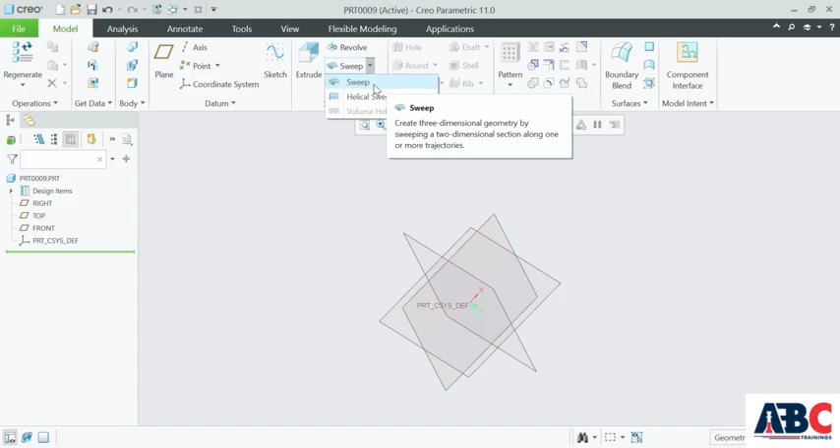So we are in the model space. Go to the sweep. There are two sweeps. First is a sweep which creates a three-dimensional geometry by sweeping a two-dimensional sketch along one or more trajectories. Then there is a helical sweep which sweeps a two-dimensional sketch along a helical trajectory.

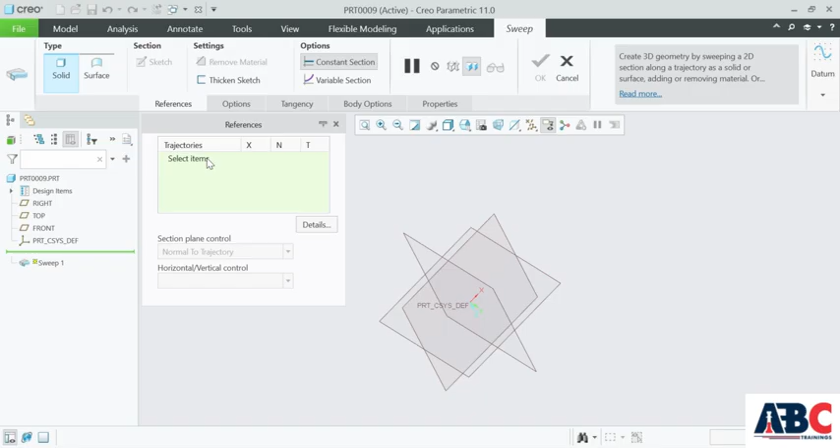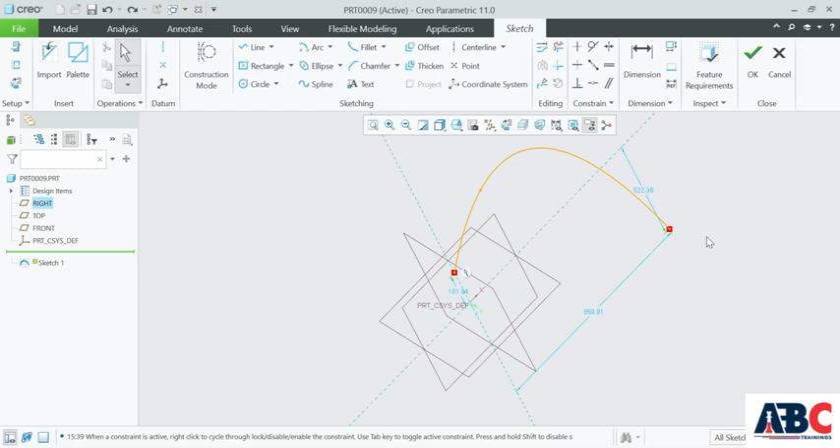We'll see the first sweep. For sweep we will need a profile. When we click on sweep, you can select the trajectory here. So first create a trajectory, sketch this plane. I will create a sketch. Click OK. Then we will go to the sweep.

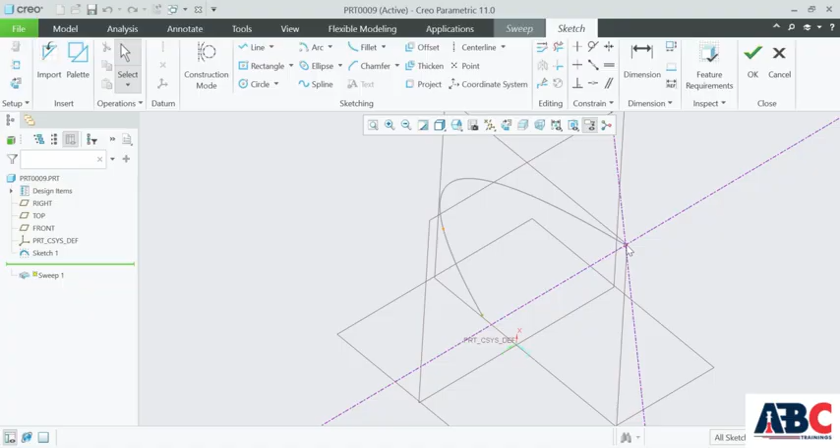In the sweep we select this trajectory. So this trajectory has been selected. We'll go to the section. We need to create a section here. Click on section, normal to this point. We'll create a section here. I will create a circle. Click OK.

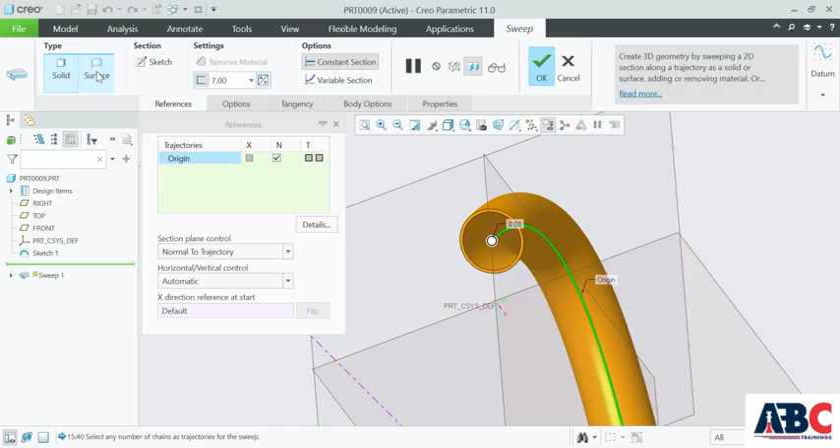We have created a sweep. You can also provide thickness to the solid model. From here you can thicken it and provide thickness. You can also create a surface from this. So this is the surface. This is solid. We can provide thickness here.

We can also create a variable section. This is a constant section throughout the trajectory curve. We can also create a variable section. Click OK. This is how we can create a geometry.

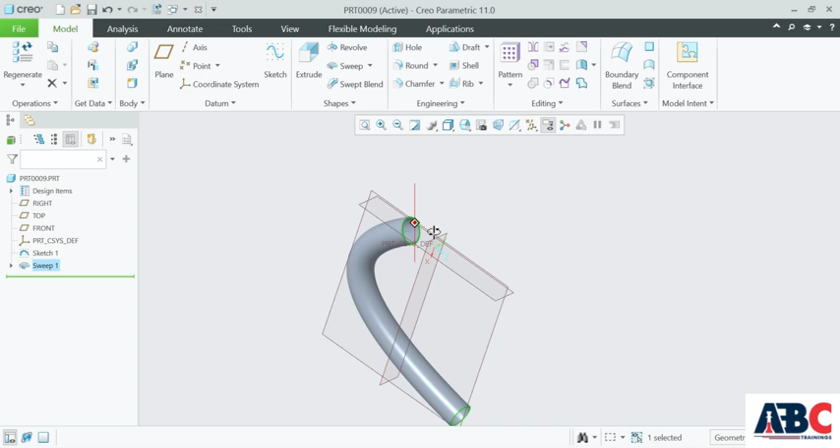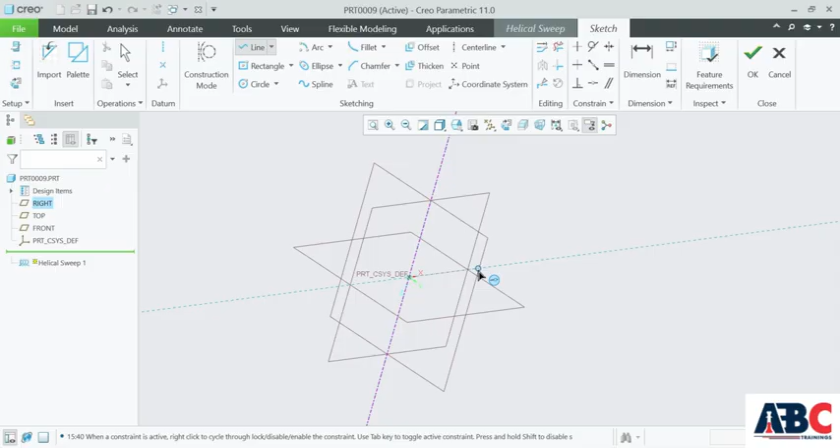Now we will see how to create a helical sweep. Go to the helical sweep command. It requires a helix profile. We will define a helix profile here. Sketch. I will create a center line. This will be the helix center line, and I will create a line here. Click OK.

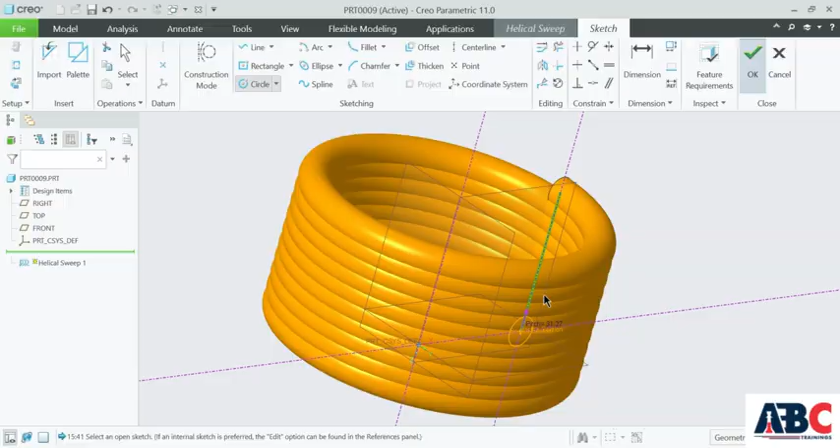We will require a section. You can see this here, section. Create a sketch, and I will create a section here. Click OK. This is how we can create a helical sweep. So this is a helical sweep.

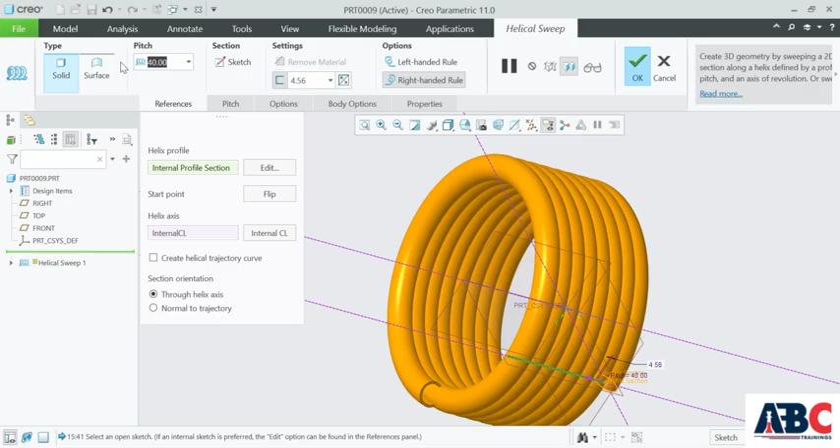Also thicken the sketch, so thickness will be provided here. And also change the pitch here. I will change this to 40. Okay, we'll change it to 70. See this, this is how you can create a helical sweep.

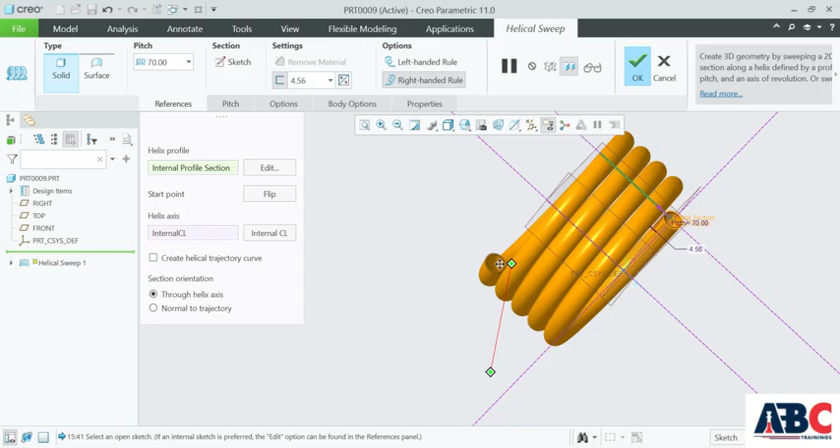This is how you can create a helical sweep in Creo Parametric. Thickness has been provided, you can see this here. You can also create a surface. So this is a surface of a helical sweep, and you can also create a solid and provide thickness.

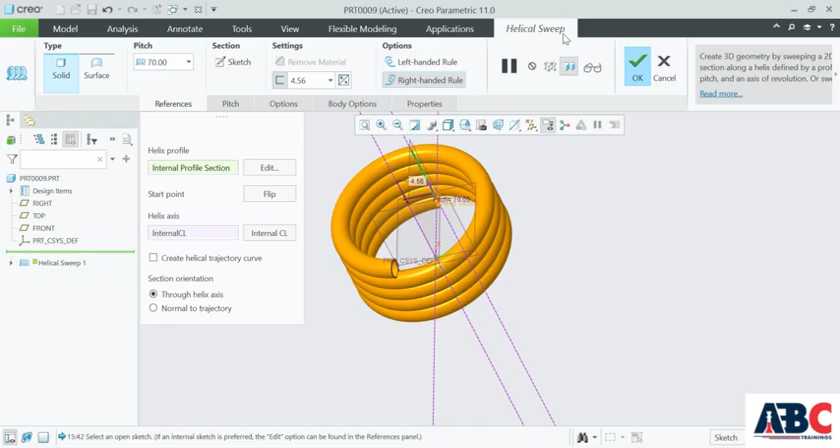Here is the left-handed rule, so it will be a left-handed rotation. This is right-handed rotation. This is how you can create a helical sweep. Click OK, and the helical sweep will be created.

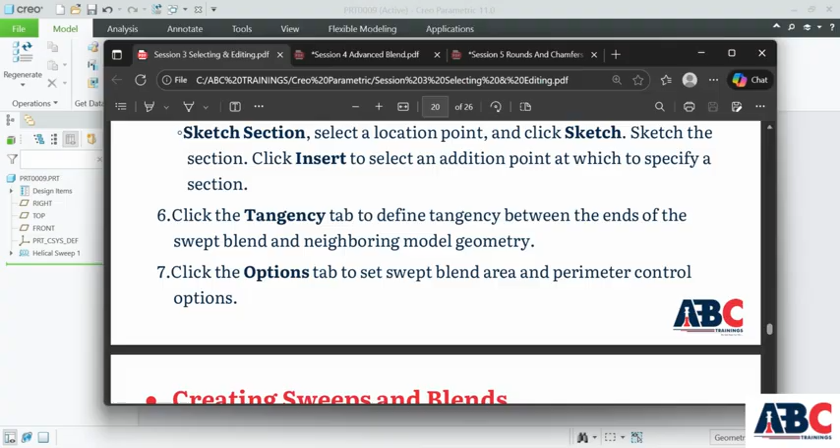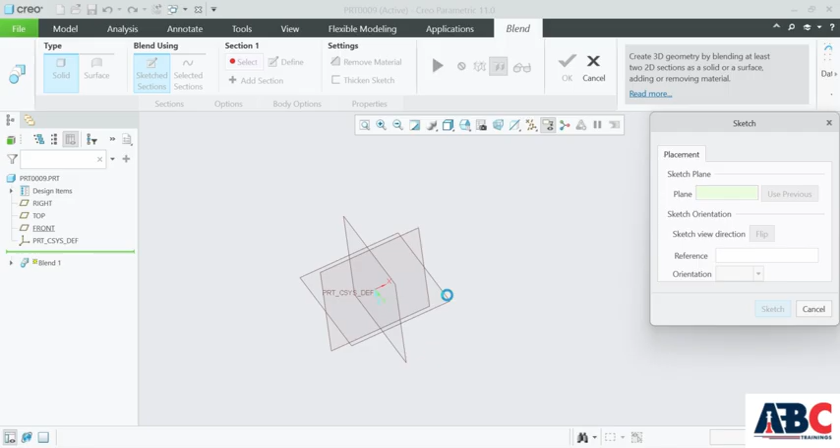Next we will see how to create blends here. So we create blends. We'll go to the blend section. Click on blend, then first section. We can also define the section here. Create a first section, I will create it as a rectangle.

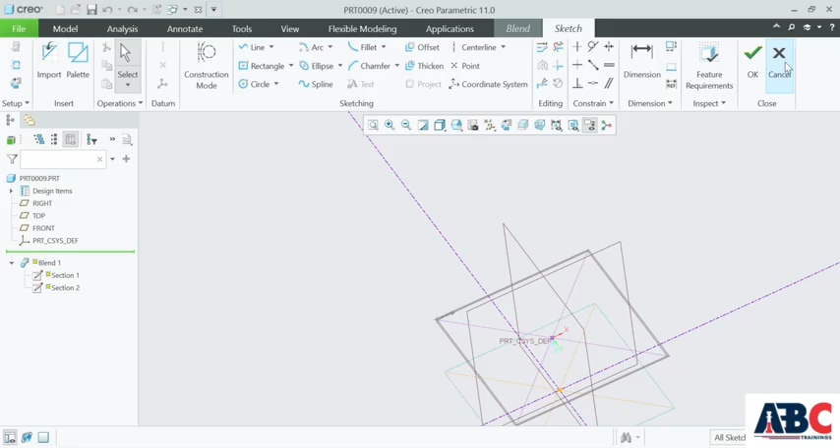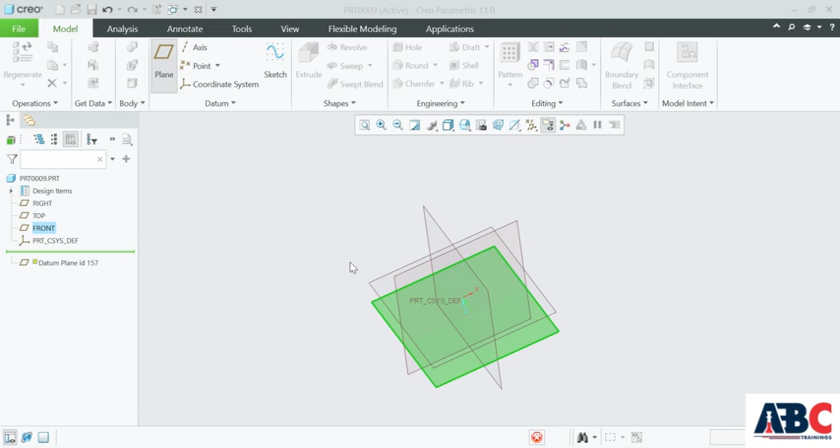Click OK. Then second section, we'll sketch. So we'll simply create a section by using datum features. Go to the datum plane. We will create a plane offset to this, 50. I have created an offset plane. I will create a sketch here.

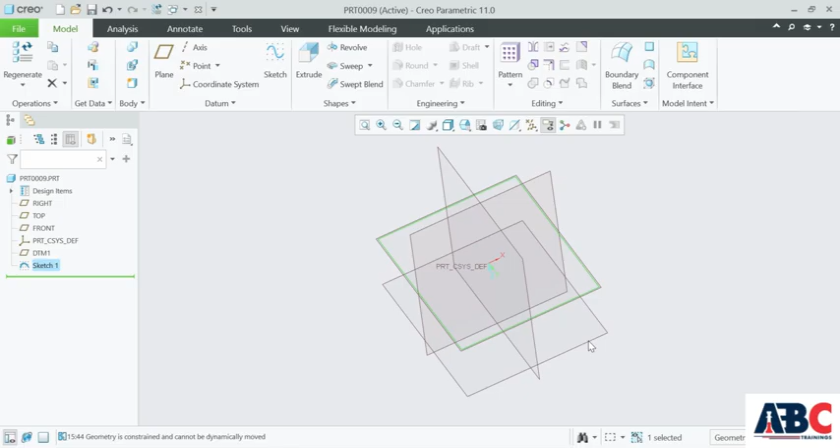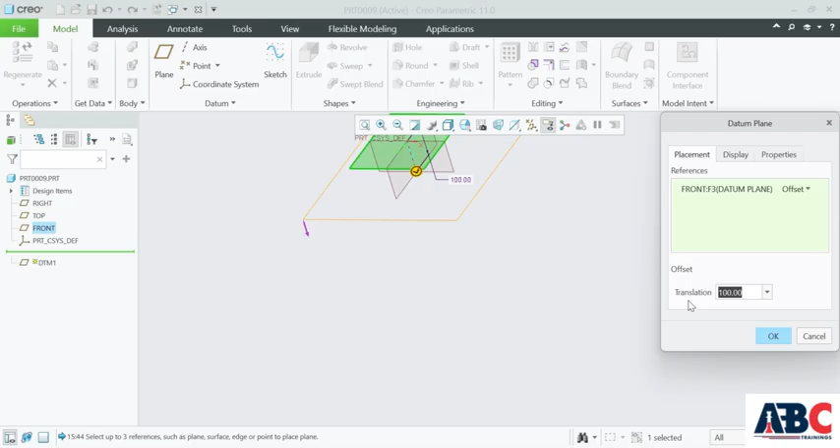I'll create a circle here, another section. Now I will edit this feature. I will change it to 200.

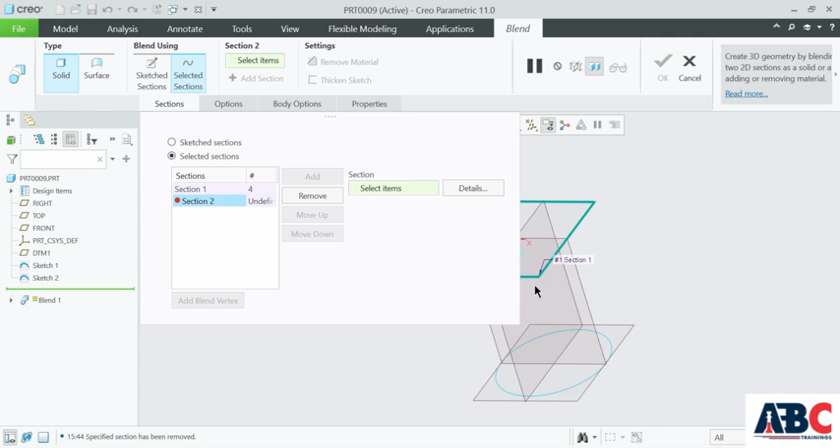Go to the blend. I'll create this first sketch, then I will select this second sketch. Selected sections come. I will select this section as first. Add, and I will select this section. You can see this.

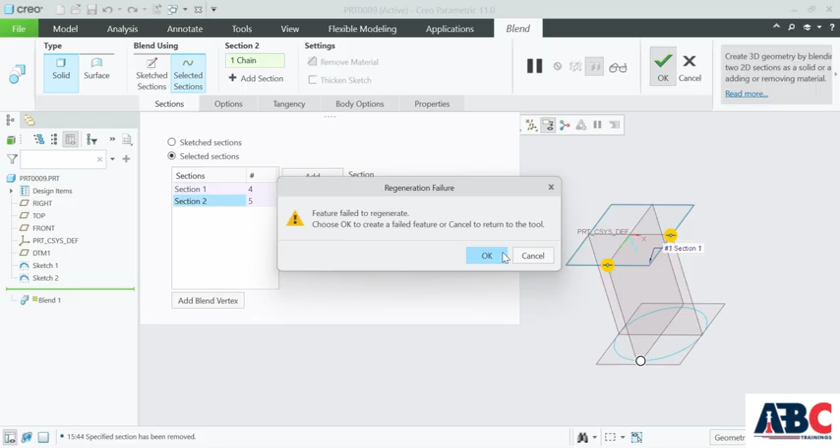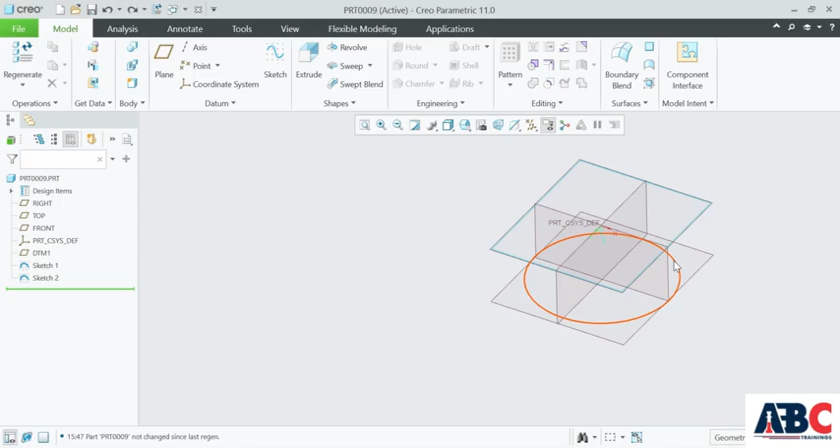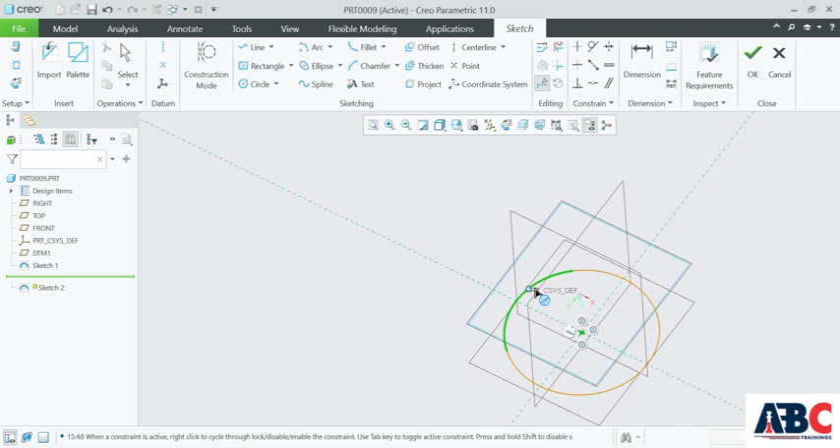If something went wrong, we'll edit this sketch. We need to edit this case, just a little modification. We need to blend this rectangle to this circle. This has 4 vertices, so we need to divide this. I will divide this into 4. So this circle has been divided into 4 arcs. I will click OK, then go to the blend.

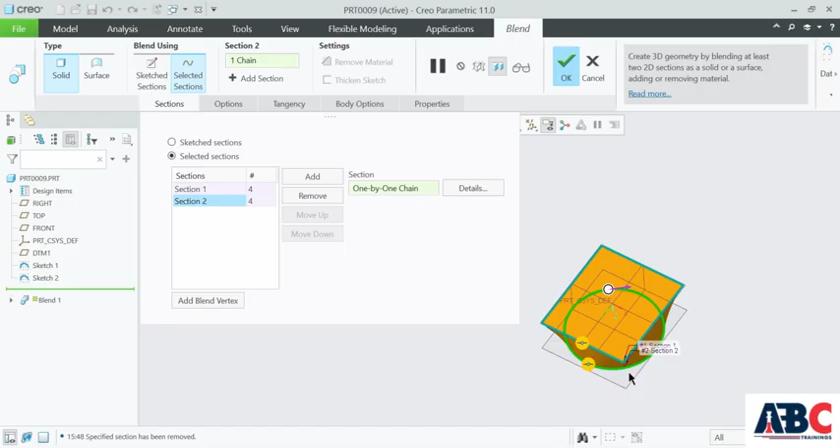We will select the selected section. I have just clicked selected section. Then I select this first section, then I go to add, and select this second section. So what happens, you see this, the points have been created on the circle. This vertex has been joined to this point, which has been divided. This is how you create a blend. Just simply click OK, and this is how you can create blends.

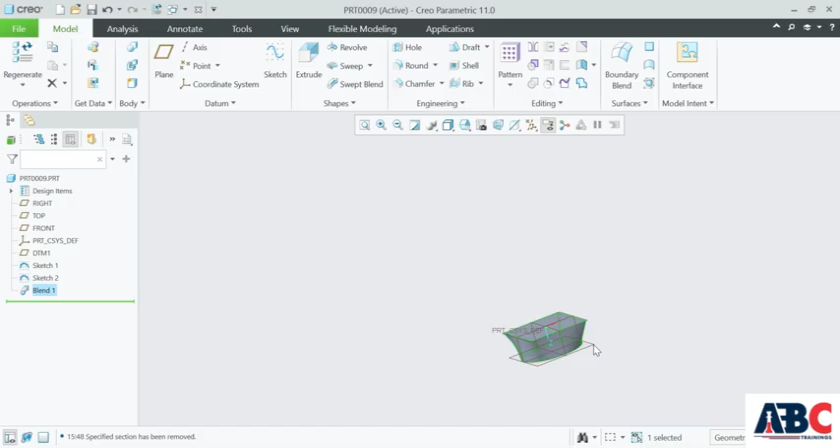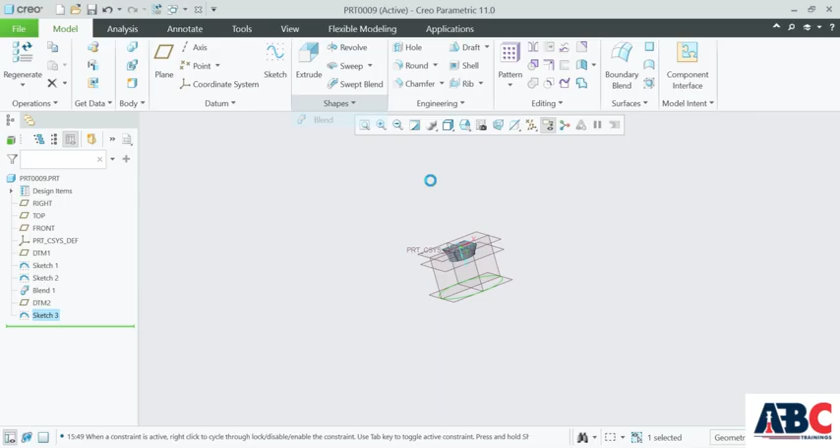We will create another one here. I will create a plane here, datum plane, offset to 300. I will create a sketch here, another sketch. We'll create a sketch, let's create a bigger circle. What I will do, I will blend this. Selected sections: select the first section, add, and select the second.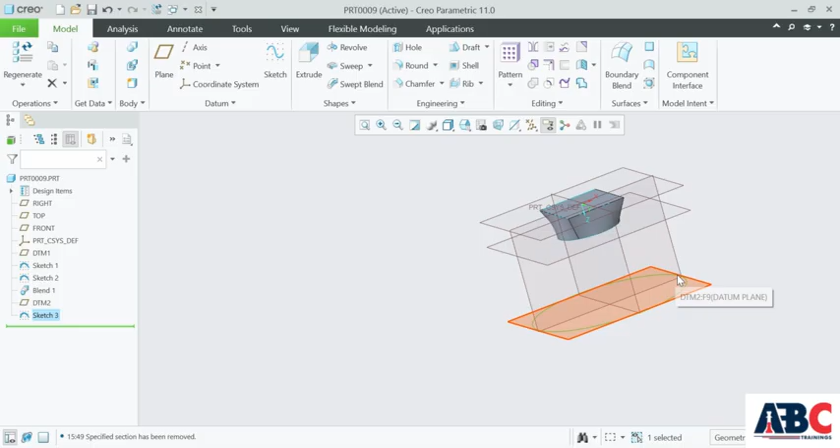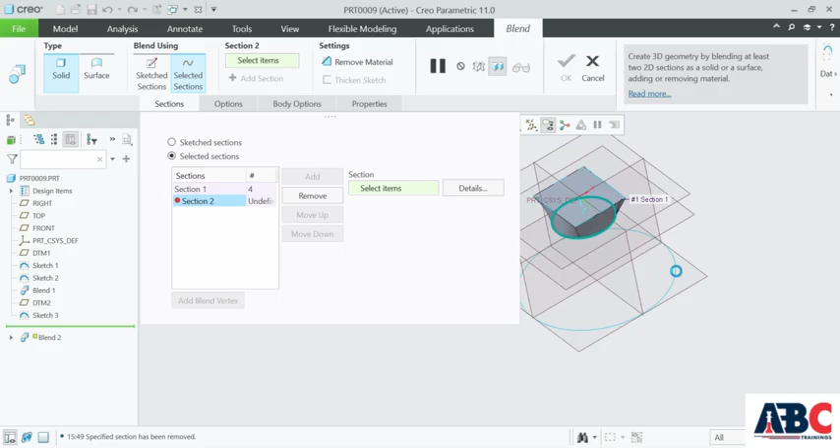We need to divide this section also. So I will just edit this sketch and edit it. I will divide this second, third, and then fourth. Go to the blend. Select the first section, selected sections, select the first section, then I will add and select the second section. So this is how you can create a blend.

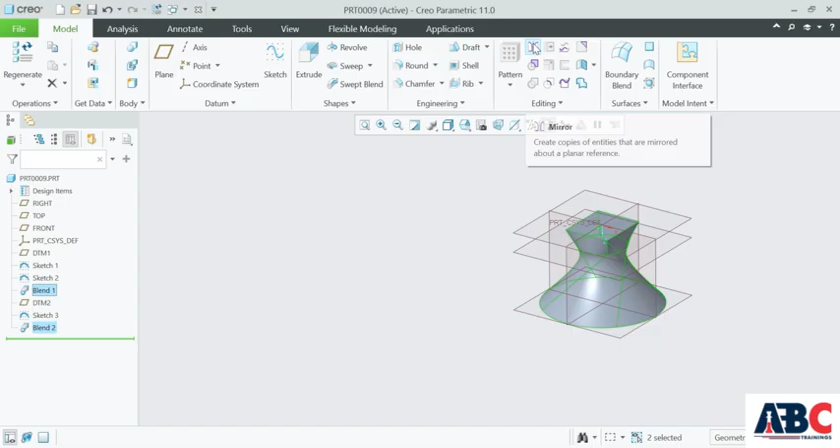There is this editing option here available. Create this blend and this blend. So what I will do, I will mirror the blend. I will go to mirror command, select the mirror plane, we'll choose this as a mirror plane. Click OK. This is how you can mirror features using the reference plane.

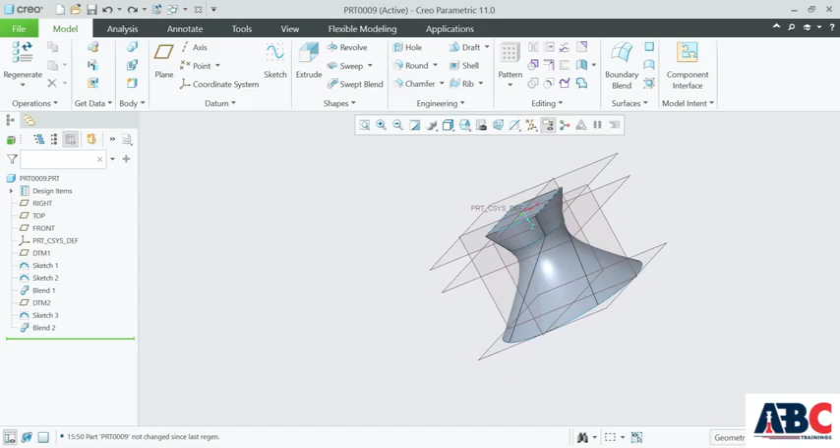This is the blend command in Creo Parametric. Thank you.